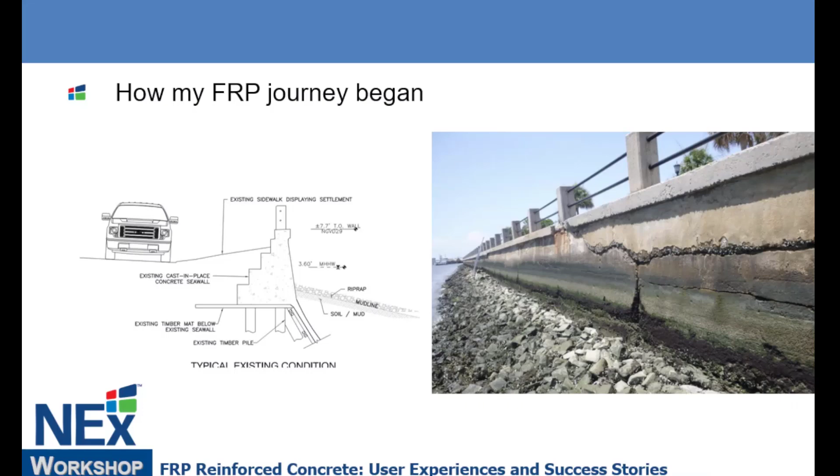So this picture is the old battery wall. When the water wasn't coming from underneath it or through it, it did a really good job of going over the top of it. Something interesting we learned about the wall is the original phase 1 had no reinforcing in it. And so when we took it out, it actually had evidence of holding up better than the later phases that had reinforcing in it. Black steel reinforcing was causing damage to the extent that the piece would just crumble when you went to cut it out.

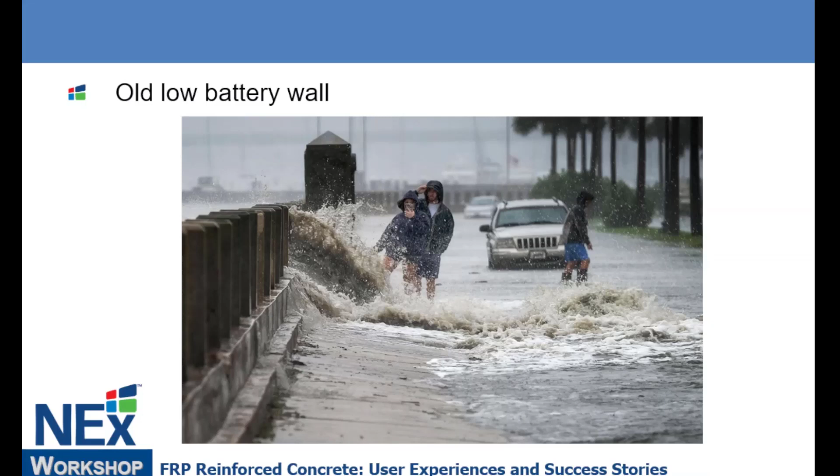So what we learned is that in 2018 and 2019, the only information we could find is that FRP was expensive. And any kind of questions we asked beyond that, we were kind of looked at like we were asking questions about aliens or Yetis or something. Our installer that we typically use to install black steel for us just said, I have no interest in it, you're on your own. So we used a solid pre-construction technique called a WAG, put our wild ass guess to it and priced it, and here we are.

So we knew where to get a piece of black steel. We didn't know where you could get FRP. We knew you could bend black steel. We didn't know how you bend FRP, to the conversation earlier. To begin with, it was more expensive, but as production has increased and steel prices have gotten higher, in some cases it's a dollar for dollar exchange. The manufacturing is a lot different. It's extruded, molded, and once the material is cured, it is set, and modification beyond cutting is almost impossible.

So this required us to dig really deep into the shop drawings to make sure there are no conflicts. Bends, shapes, certain different sizes take longer to make. So we couldn't find out we had a conflict in the field. Manufacturing FRP takes weeks, molding shapes takes months. And then it came to the never-ending problem with shortages. Rebar shortages on job sites are very common. So not enough hooks, not enough hairpins. How do you get in front of that?

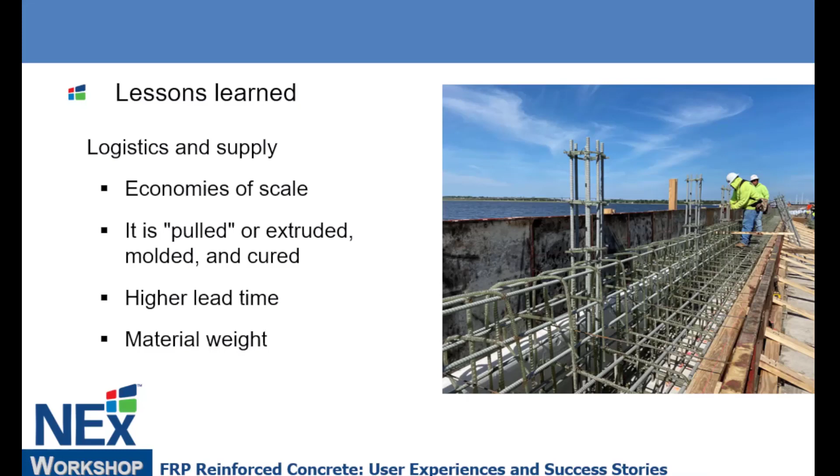As contractors, we have leaned on the reinforcing steel suppliers to make up for bad plans, bad submittals, bad drawings, bad shop drawings, and a general lack of planning. If you do this with FRP, it will burn you. My nightmare scenario that kept me up at night was a possibility that we could have the wall that protected Charleston, albeit badly, demolished, and not have the necessary FRP to replace it as a hurricane came our way. Like I said, not all publicity is good.

Production of shapes: as the technologies move forward, I hope one day the bending of FRP can be closer to the process of steel, but right now it's molded, and it's very important because, as you can imagine, molding is not as fast as steel. In this picture, you have the same shape and size over and over as far as you can see, and it's easily manufactured due to the repetitive nature. A lot of projects are not like this, and FRP has a disadvantage. When you have a different shape, you have to have a different mold, and so it just takes a lot longer.

And unfortunately, none of us are perfect. Some of the drawings change sometimes. We have problems, we mess up, we make mistakes, and when you do that, you have to react. When that happens, the quick reaction necessary to keep the project going is usually going to make you use either black steel, stainless, epoxy coated, something along those lines if you can't wait and shut down the job, for lack of better words.

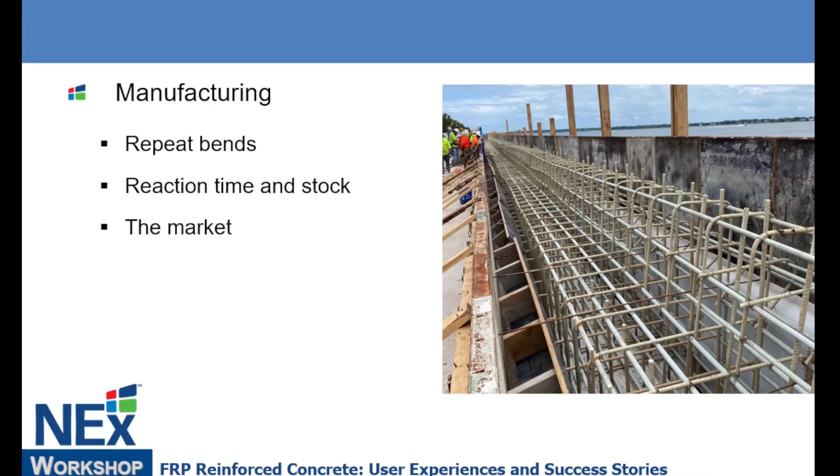On the topic of cutting, an FRP splinter is not fun. They are very sharp, they are hard to see, and they will go through typical nitrile cut 1, cut 2 level gloves. You need heavy leather gloves to protect your hands. Differing manufacturers' products act differently. Some are more friendly than others. Some are much more prickly and splinter a lot easier than others.

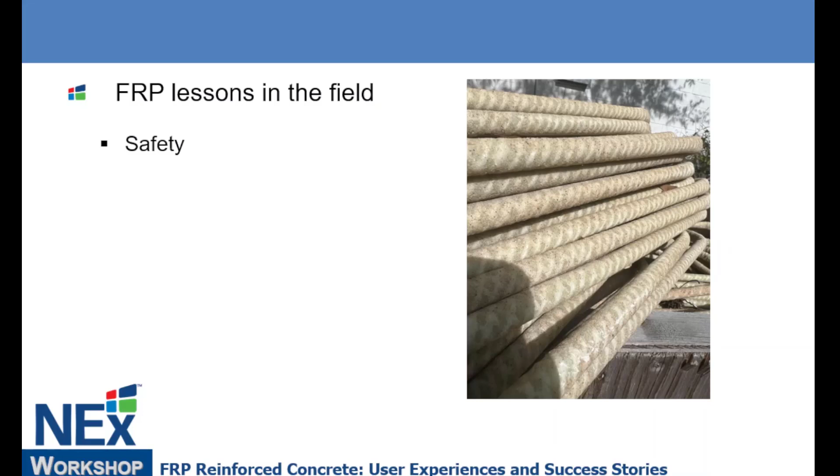You can cut it with typical abrasive blades, circular saw, sawzall, hacksaw; just about any way you can cut black steel, you can cut FRP. A metal blade, like a Metabo metal blade made for cutting black steel, will hold up really well to cutting FRP. It's a very quick, clean cut, and it will not fragment. Long sleeve shirts, glasses, face shields are recommended for cutting FRP.

In the field, the shapes and sizes come into play because of the size, the supply concern, and because of the differing shapes, you might have some congestion issues. So you may not be able to bend, quote bend, or mold your FRP in the same manner you do black steel. So you may end up with 2 to 3 pieces of FRP to replace 1 piece of black steel. So when you do this, you can have some congestion issues. You may have a concrete crew that shows up wondering where to put the concrete.

So you gotta have a plan: SCC, small rock, smaller head vibrators to place your concrete. Make sure you go over that with your engineering team, your placement crew, and your ready-mix company to make sure you're all on the same page.

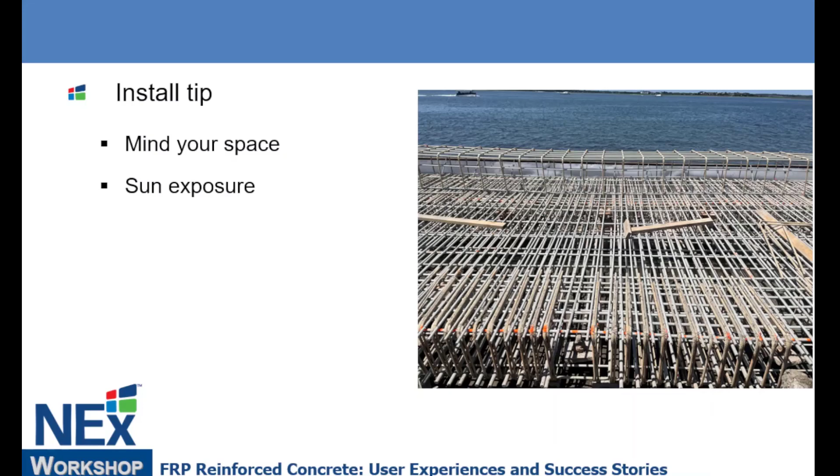It's also necessary to get it out there early, but it degrades in sunlight after about 4 months. So if you get it out too early on the job site, it will cause some issues if you don't protect it or don't have a way to limit that exposure. Once you have all the planning and get the product on the job site is really where the results start to shine.

So it's lighter, looks a little bit different, but otherwise it installs just like black steel. And once you grab a hold of it, be prepared for some really amazing results. The crews that put it in love it. This material is a quarter of the weight. Morale went up a lot because they're not burning their hands because it's not black, and it's not heavy anymore.

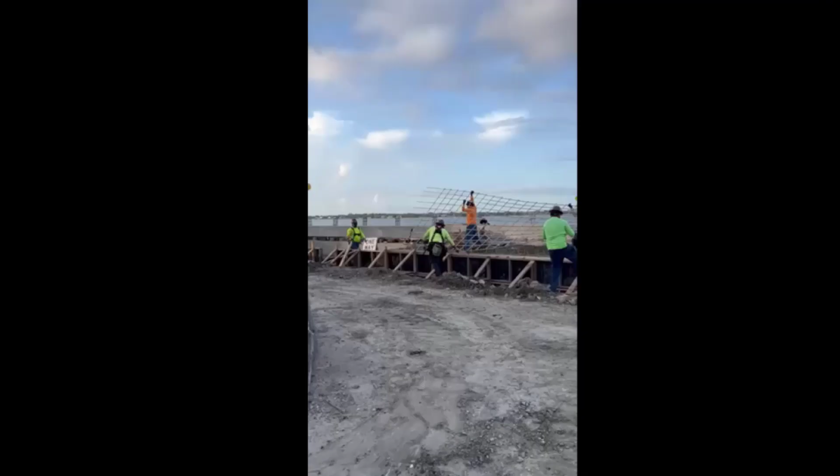And so the lower weight made pre-tying possible when it wouldn't have been possible due to the limited access on the job site. Carrying a grade beam by forklift now becomes carrying a grade beam by hand. In this video you can watch some guys carrying a 30-foot mat. It's 30 feet long and 14 foot wide, and they just carry it in place by hand. If this was black steel, you would never be able to do this.

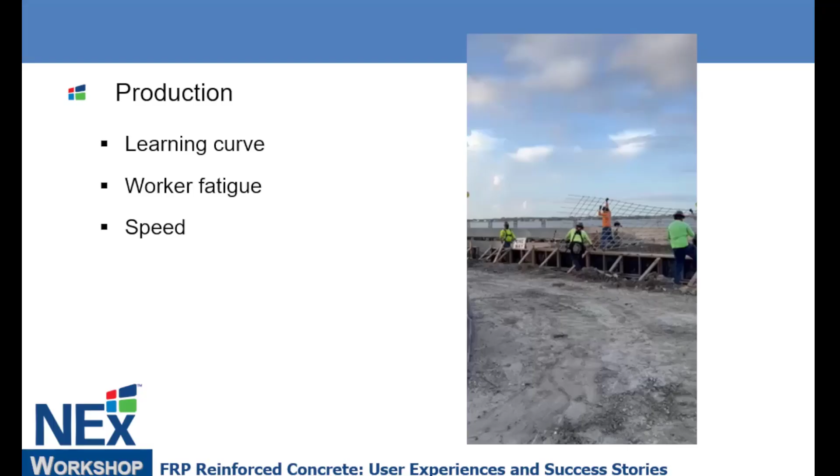These two slides are very similar to that. It's carrying sections of FRP that we pre-tied into place. This is a piece of a wall beam, and we're just walking it into place. And this is a piece of grade beam, and walking it into place.

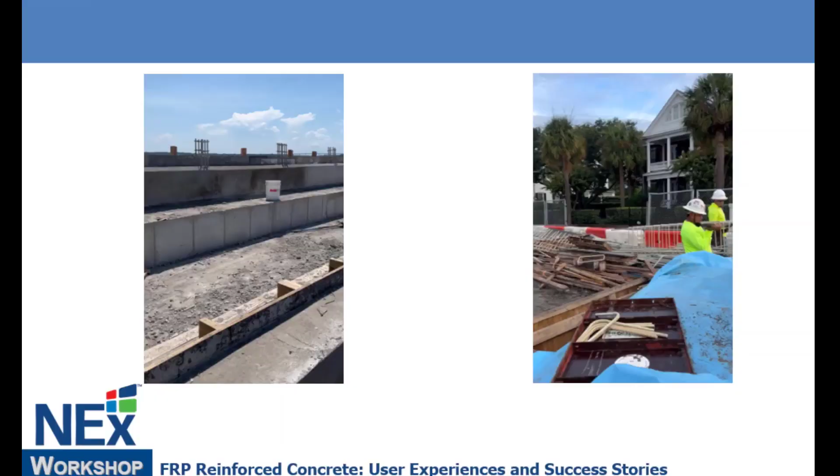This picture was taken on a Wednesday morning at 7 a.m. It's about 110 feet or so of old existing wall cut and ready to be taken down. This picture was taken 34 hours later. 110 feet, formed, tied, inspected. We poured it the next morning.

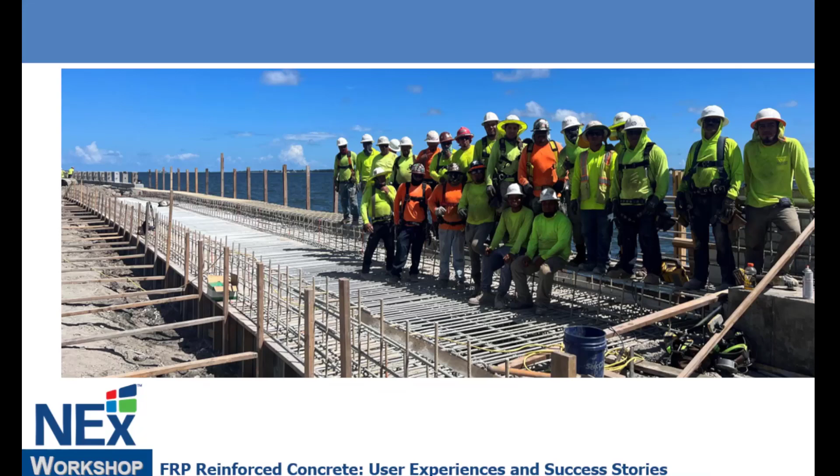I went out to tell them how great of a job they were doing. And my foreman on the job said, man, we left a lot of time on the table. And I said, what in the world are you talking about? And he said, we could have done it faster. We should have poured it today. And it's really interesting because the lightweight material made it almost like a game for some of them to see how fast they can do it. They're just having fun doing work that used to not be so much fun, just throwing it into place.

And this is the final result. The picture on the left-hand side is the low battery wall phase 2, standing on it, looking down towards 1. The picture on the right-hand side is the termination point of phase 1. Phase 1 and phase 2 are both about 900 feet long. Phase 3 is 1,800 feet long, and we did phase 3 in the time it took to do phase 2. So it's twice as long, and we did it in half the time.

So where we're trying to take FRP: as you have figured out, I like it a whole lot right now. As the pandemic hit, prices got crazy, and some supply issues popped up where specific wire meshes and especially heavy gauge steels weren't available anymore. So it presented us with an interesting opportunity to value engineer some projects with some ability to hold teams hostage. If you want to build the project, you're going to have to change the product you've used. So some originally rigid engineers were now very open to suggestion, and we were able to bring in manufacturer engineers and change some stuff out.

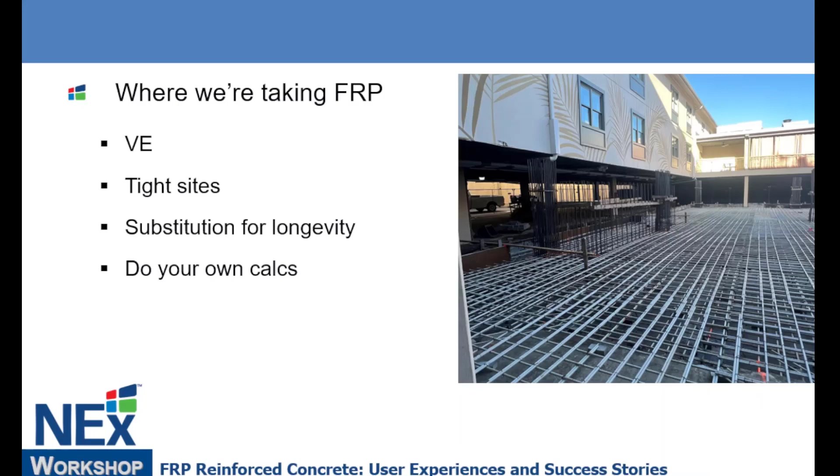As wire mesh prices and steel prices have settled in to where they're at right now, it's almost a dollar for dollar exchange with FRP, depending on the application. Anywhere you have a high likelihood of exposure, I suggest looking at it. And if you're trying to make the change, find an engineer or a manufacturer who's familiar with the product and the codes.

This is a picture of where wire mesh was originally designed. It was at a stadium, and there was a tennis tournament coming no matter what, so the wire mesh wasn't available. We changed it over to FRP. The manufacturer had set up to bring a film crew in because it was a big deal, it was a big project. And the film crew showed up that morning, and we weren't over there tying FRP yet.

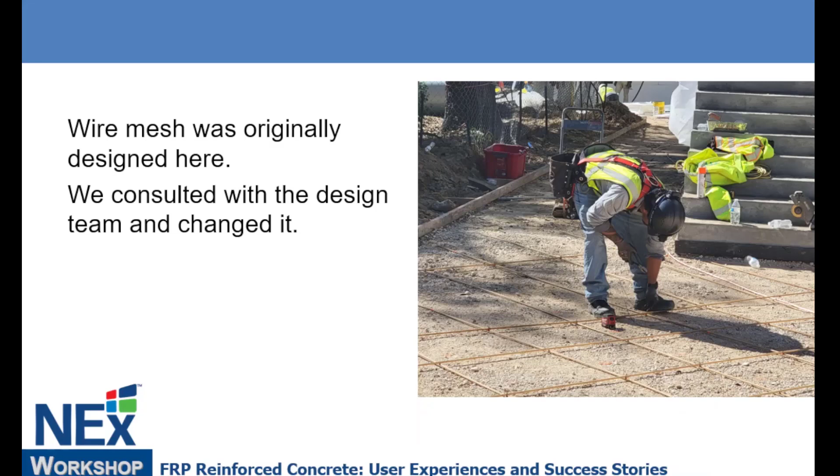It wasn't ready. So the superintendent drove over to the yard, threw his bundle of FRP on the back of a truck, drove it over, and unloaded it himself. No equipment, just him. And so that was really all the promotional filming they needed to do. They were done after that. And it's just really, really fast.

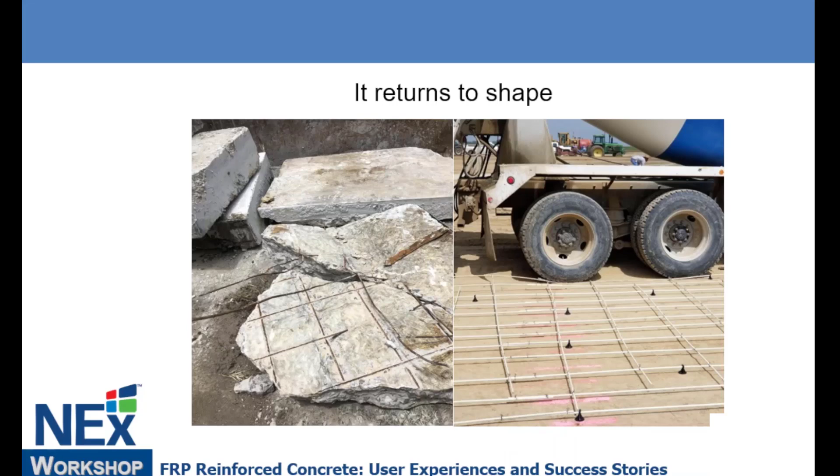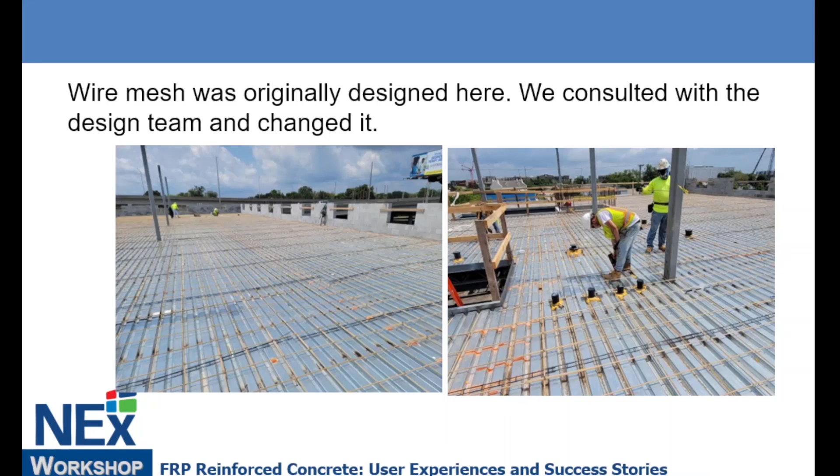So we changed it to FRP, primarily because we like it, and secondly because we could force the issue. In doing that, you can hand it up by hand if you really want to. You can fly it up with a forklift and just unload it by hand. It's very easy to handle.

If you're interested in using FRP, the first thing I would recommend you do is find a friend, a partner, manufacturer, engineer, contractor who knows the product. Over the 3 phases of the low battery wall, it went from about 20% FRP, 30%, to 100% at the 3rd phase, all FRP. And the reason for that was because the engineers weren't comfortable with the FRP. We weren't comfortable with it. No one was comfortable with it. And so as we got better information and better partners, everybody was a lot more open to using it.

The FRP manufacturers will come to you. They'll do lunch and learns. They'll help engineers. They will help you change a product or project over to their product if feasible. And I have some high aspirations for FRP. As long as black steel oxidizes, it's here to stay.

Conventional black steel fabricators have the best existing tools for the management of FRP. They already have the estimators, detailers, project managers, and are versed in the management of steel reinforcing. And so that crosses over very well to FRP. And the early adopters of this process and fabrication of FRP and manufacturing FRP management with manufacturers are going to have some flexibility and advantage over people who don't.

And so say an executive at a very large manufacturer had the opportunity to partner with somebody several years ago and he said, we make black steel. And now he's at a disadvantage because his black steel rusts. And the guys who he was kind of shunning, they're at an advantage now.